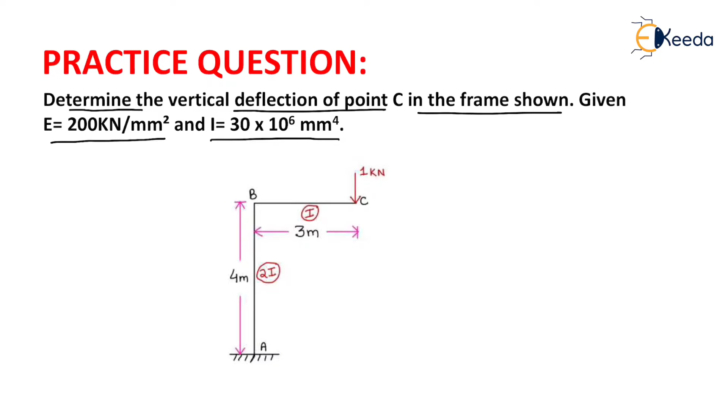Question is written as: determine the vertical deflection of point C in the frame shown, given E equals to 200 kilonewton per mm square and I equals to 30 into 10 to the power 6 mm to the power 4. Now we need to find the vertical deflection of point C.

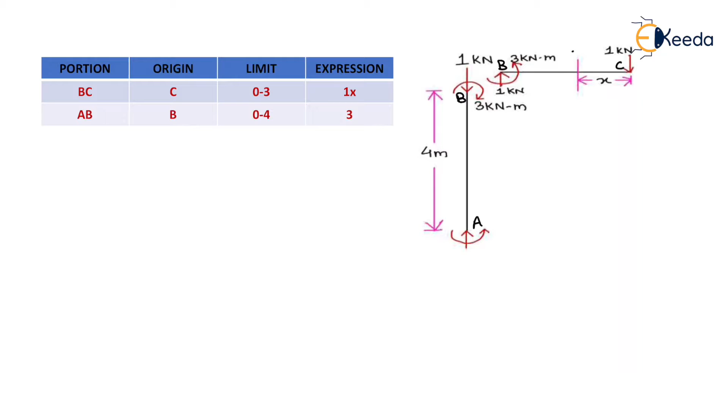Now for finding the vertical deflection of point C, we had just made the free body diagram like this, that is A, B, B and C. Now due to this unit load at C, we will have the moment about XX section which will be equals to minus 1 into X, that is minus 1 into X of hogging nature.

Now at B, due to this unit load at C, there will be an anti-clockwise moment of 3 kilonewton meter. Now due to the joint equilibrium of joint B, we will have a 3 kilonewton moment acting in the clockwise direction here like this.

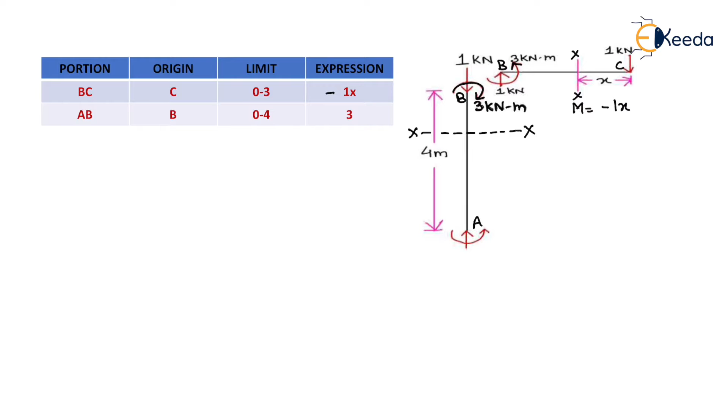Now if we want to compute the moment about this section, that is XX section, for the span AB, we will have the moment equation here which will be equals to minus 3 because of this 3 kilonewton moment, and because of this 1 kilonewton force there will be no moment because there will be no perpendicular distance for this 1 kilonewton load.

So for the portion BC from the origin at C, the limit of this span is 0 to 3 meter and its expression will be equals to minus 1 into x. Now for span AB, the origin is B and its total limit is 0 to 4 meter and its expression for moment is minus 3, minus is for hogging moment.

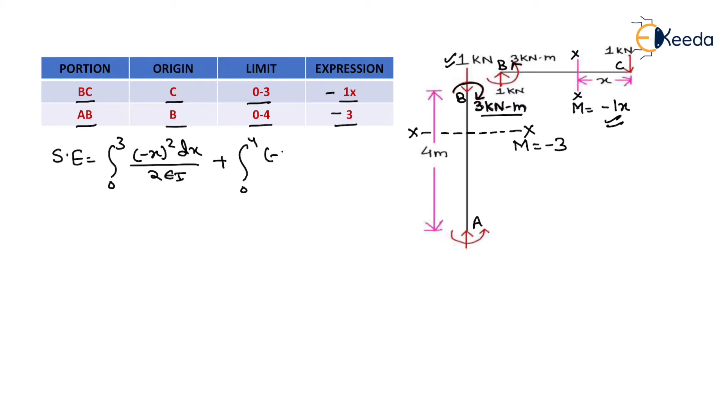Now we need to find the strain energy of this frame. It will be equals to integral 0 to 3 of (minus x) square dx upon 2EI plus integral 0 to 4 of (minus 3) whole square upon 2EI into dx.

Now after solving this, we will get 1 upon 2EI into x cube by 3, with upper limit 3 and lower limit 0, and after solving the second expression we will get 9x upon 4EI from 0 to 4. Now after solving the whole equation, we will get strain energy equals to 13.5 upon EI. That will be the total strain energy of this frame.

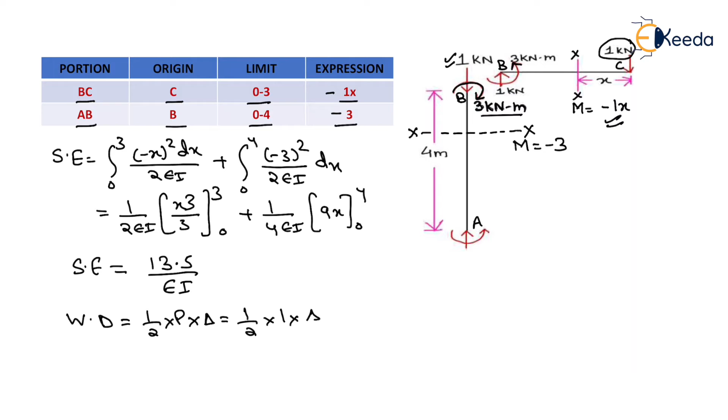Now we need to compute the total work done by the external load here. So the total work done will be equals to half P into delta. Here the value of P will be equals to 1 kilonewton because 1 kilonewton of load will be acting at joint C. So we just write the value of P as 1 and delta as delta. We will get the value of work done equals to delta by 2.

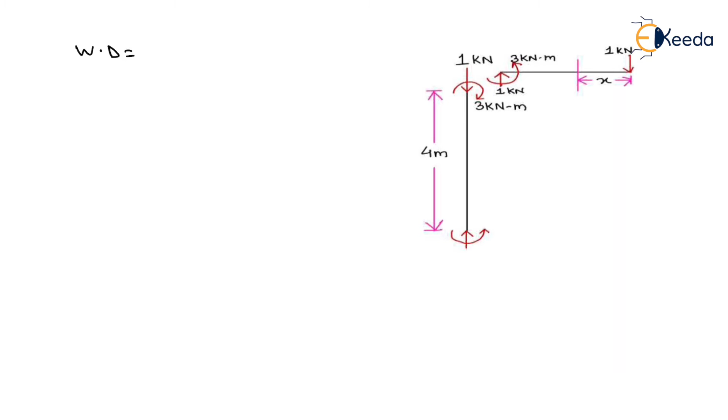Now according to the strain energy method, the total work done will be equals to the strain energy of this frame. So delta by 2 equals to 13.5 upon EI. After solving this, we will get delta equals to 27 upon EI.

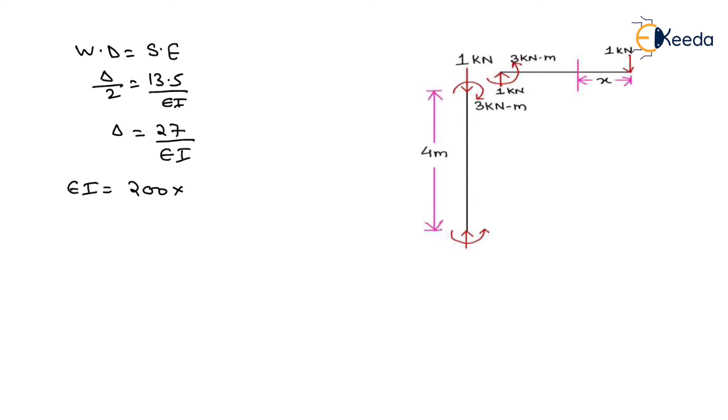Now we have the value of E and I. We just compute the value of EI, and after that we will put it here. The value of E will be equals to 200 and the value of I will be equals to 30 into 10 to the power 6. Now we want the answer in kilonewton meter square. For this we need to convert this by multiplying 10 to the power minus 6. So its value will be equals to 6000 kilonewton meter square.

Now we had computed the value of EI in terms of kilonewton meter square. Its value will be equals to 6000. Now we just put this value in the delta equation. It will be equals to 27 divided by 6000 and the value comes out in meter. So its value will be equals to 0.0045 meter.

But we want deflection in mm, so we need to multiply here by 1000 and it will be equals to 4.5 mm. Now we had computed the deflection of the joint C, which will be equals to 4.5 mm in this question. Now we had completely solved this question.